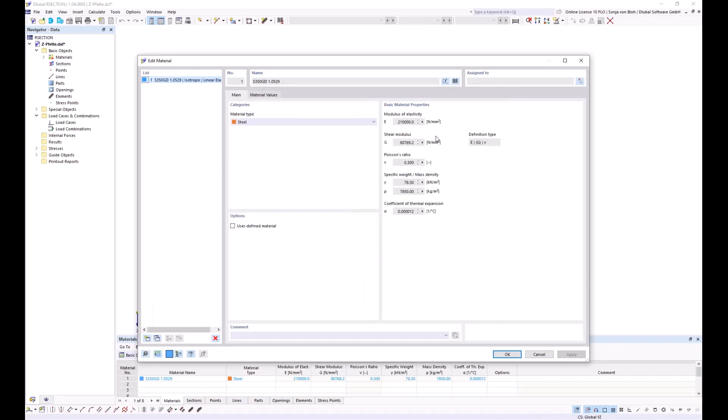Furthermore, I have to define the material here. I just want to use the material already shown, but if I wanted a different material, it would be possible to open the material library and select one from there. Click here on Cancel, then I start the import process and click on OK.

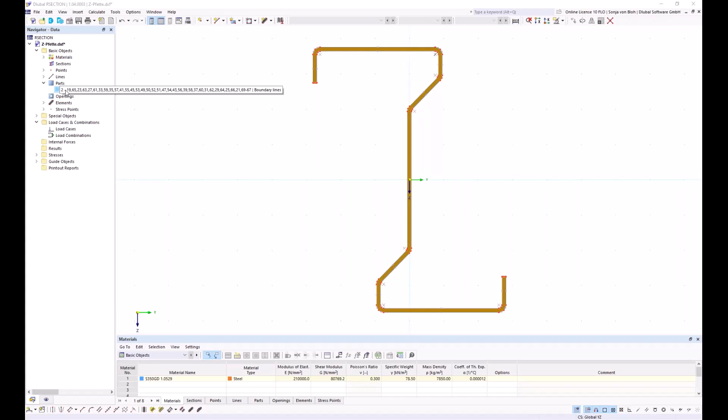With this import function, the part is created automatically, and the elements are also created automatically, as you can see here. The elements are required for the calculation using the thin-walled analysis and for the calculation of the effective cross-section.

I now want to go into the base data and choose the analysis method. Two analysis methods are available: the finite element analysis and the thin-walled analysis. I choose the thin-walled analysis. As already mentioned, elements must be defined for this. This setting only affects the default setting in RSTAB; if necessary, I can change the analysis method in RSTAB.

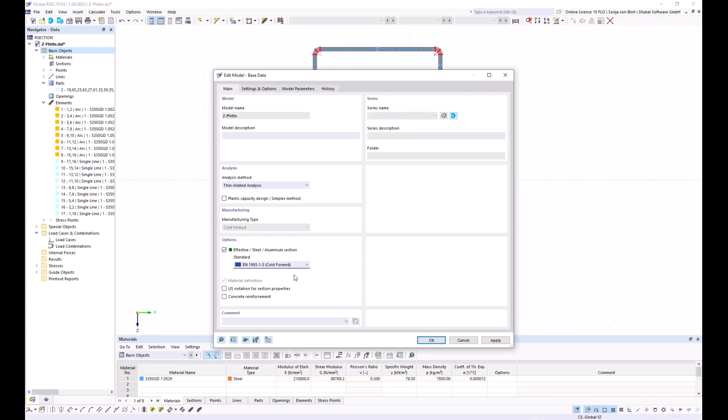Furthermore, I activate the add-on Effective Steel Section, and choose the standard Eurocode 3 Part 1.3 for cold-formed cross sections. This setting is necessary so that the steel design in RSTAB is carried out according to the standard for cold-formed cross sections. Then I click on OK.

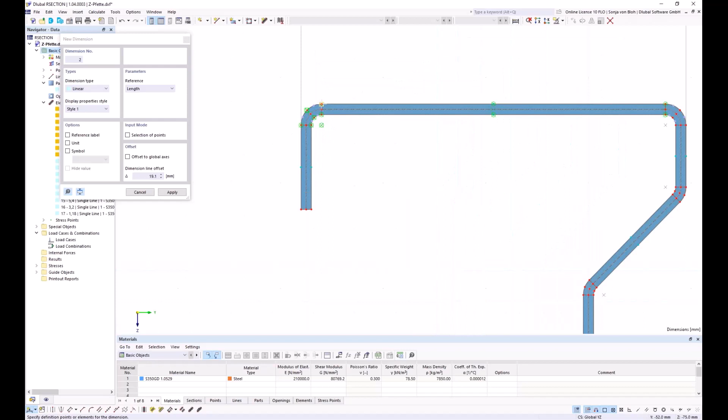It's also possible to dimension the cross section. I will do this, creating a new dimension and choosing the corresponding points. These dimensions can also be displayed in RSTAB.

In RSECTION, I can also calculate the effective cross-section and the stresses. This is useful, for example, for a preliminary design. This has been demonstrated in previous webinars, so I won't go into it today.

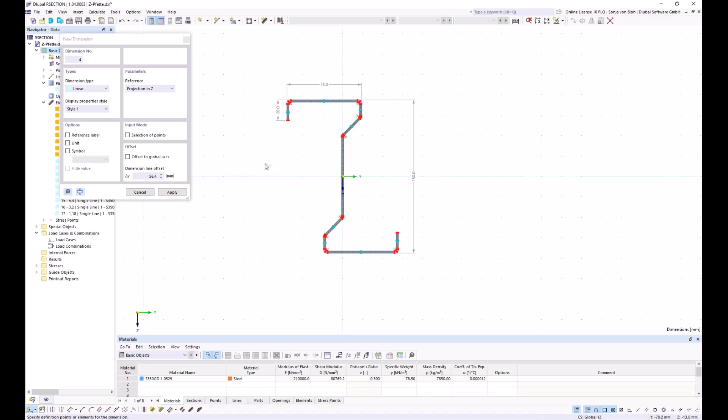However, it makes sense to start the calculation once to find any modeling errors. I go to Calculate All, and no error was shown, so it's possible to import this cross-section into RSTAB. Then I save this file, click on Save, and save it in this directory, and then I can switch to RSTAB.

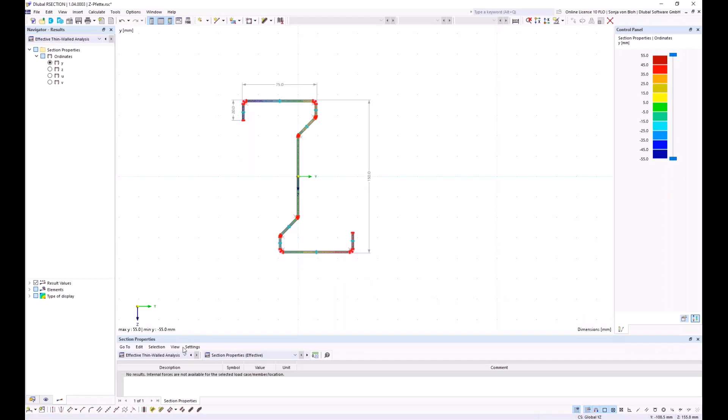I have already created the steel hall in RSTAB. The purlins consist of the cross-section just created in RSECTION. For now, I have assigned this cross-section to them, and I want to modify this cross-section.

For this, I open the Edit Section dialog, and then I open my cross-section library. And then I want to import my created cross-section in RSECTION.

The folder in which the RSECTION cross-section is stored must be integrated into the Dlubal Center. It's only possible via the Dlubal Center to import a cross-section from RSECTION. And I want to put this folder directly under the project, so I check.

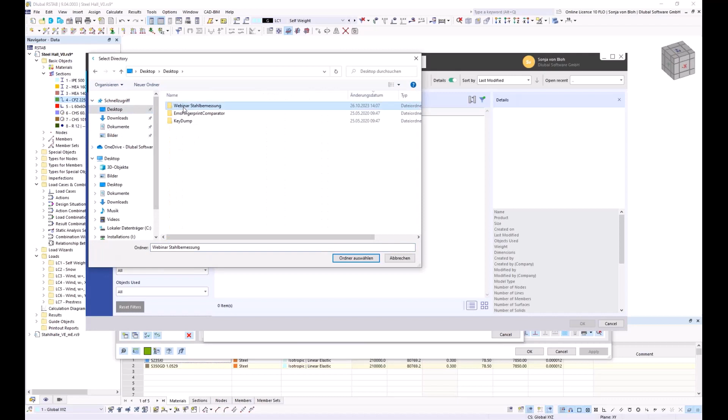I choose Add Existing Project here from the context menu, and then I choose my folder. It's here on the desktop, and then I click on OK. The folder is now linked to the Dlubal Center, and I can select the RSECTION cross-section.

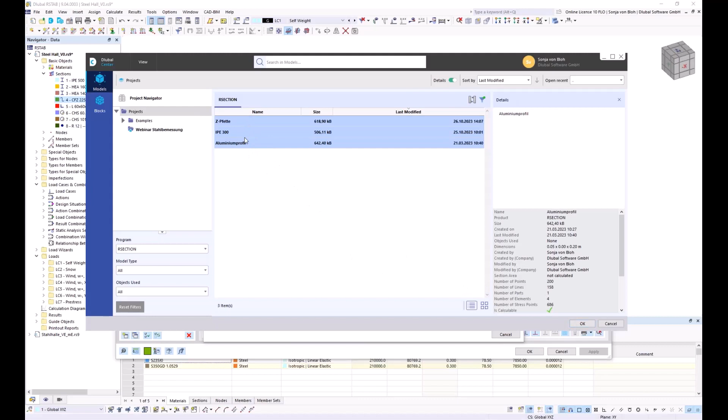It has recently become possible to import multiple cross-sections in one step. For this, I have to select these cross-sections, and then I can click on OK, and all the selected cross-sections will then be imported into RSTAB. Now I only want to import this cross-section, so I click on OK.

Here the checkbox thin-walled model is activated. This setting was taken from the chosen analysis method in RSECTION. However, I can also deactivate this option here so that the calculation of the gross cross-section properties is then carried out using the finite element analysis. If this option cannot be selected, then no elements are defined in the RSECTION cross-section.

You can see here in the graphic of the cross-section that the dimensions are shown. These are the dimensions I have created in RSECTION. And I click here on OK.

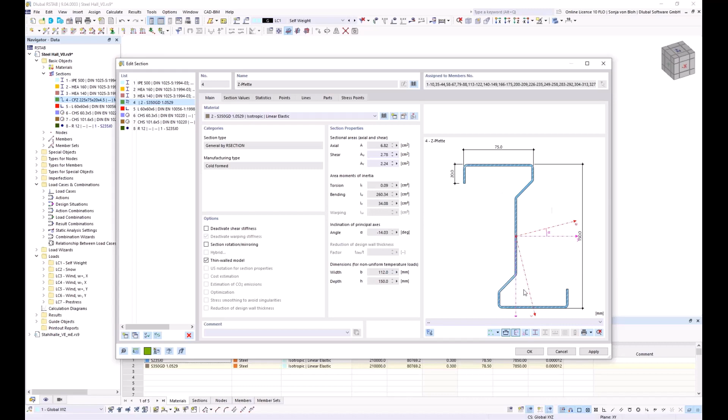For cold-formed cross-sections, the center of shear lies outside the cross-section and the main axes are rotated. Usually the loads don't act on the shear center, which results in double bending and torsion. Usual lateral torsional buckling checks cannot be carried out.

Eurocode 3 Part 1.3 includes design methods for cold-formed purlins, but the purlins must be within certain limits. These simplified design methods are not implemented in steel design. The lateral torsional buckling of any purlin can be carried out according to the second order theory, considering warping torsion and the use of equivalent imperfections.

I would like to show this approach today, and for the calculation considering the warping torsion, I first activate the add-on warping torsion in the base data. For this, I go to the base data, on top add-ons, and then I activate this checkbox here.

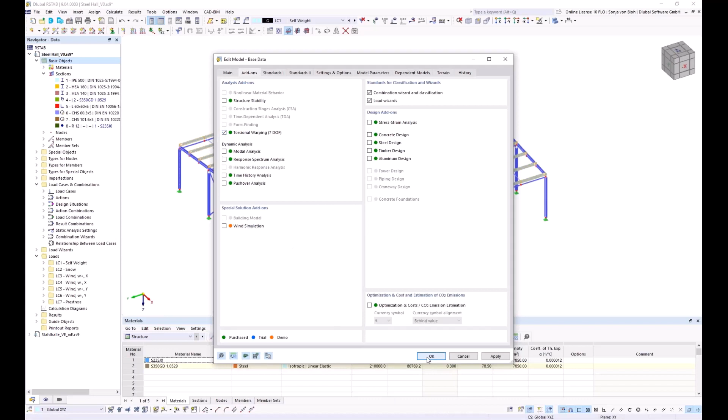Warping at the member ends is assumed to be unhindered by default. To transfer the warping between members that are connected, you can define a set of members. The frames consist of several members.

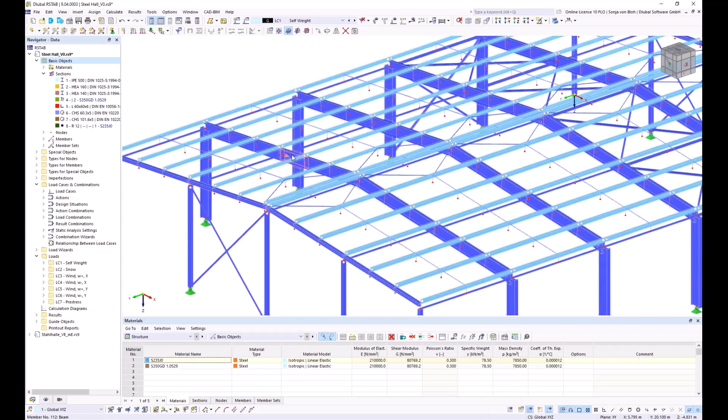You can see it here. These members are divided, and this means that there are warping releases between each member. The warping should be continuous for the frames, so I've already defined a set of members for them.

I show you this in the wireframe model. Here I've created the set of members for each frame, and if I open the Edit Member Set dialog, then you can see here a checkbox discontinuous torsional warping. This option controls whether the warping should be transferred or not. This is supposed to be transferred, so I don't check this checkbox.

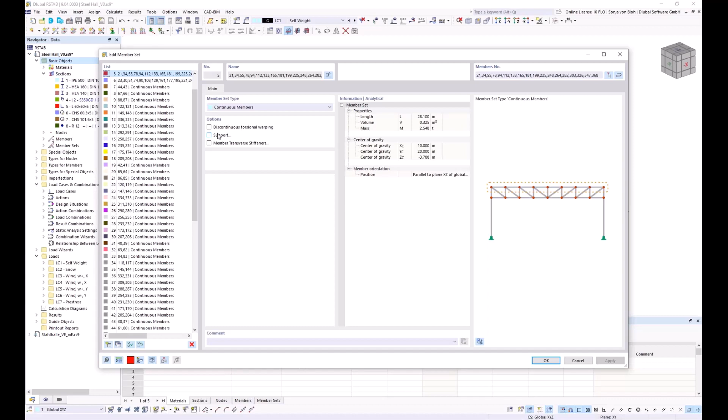Furthermore, the purlins are divided at the connection point here with the purlin suspensions, and the warping should be continuous for the purlins. So I've defined set of members for the purlins too. You can see it here.

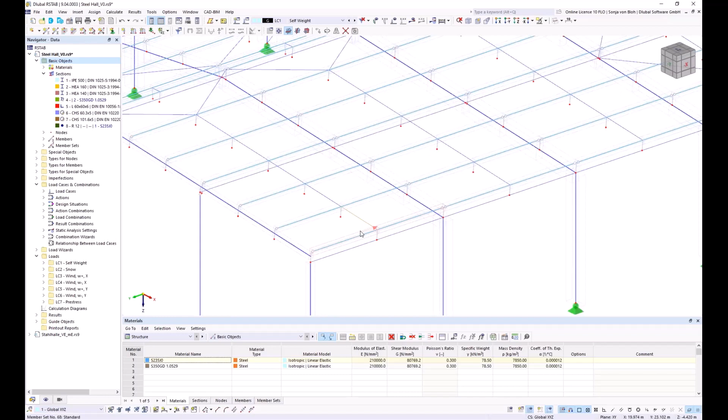When calculating with 7 degrees of freedom, the connection of members is always assumed to be at the center of gravity. If the connection is to be made at a different point, you can use member eccentricities, or you can also model the connection with rigid members.

In the steel hall, I have already defined member eccentricities for the transoms, the purlins, and the purlin suspensions. To do this, it's necessary to activate the checkbox eccentricity in the member dialog. I have done this here for the suspension.

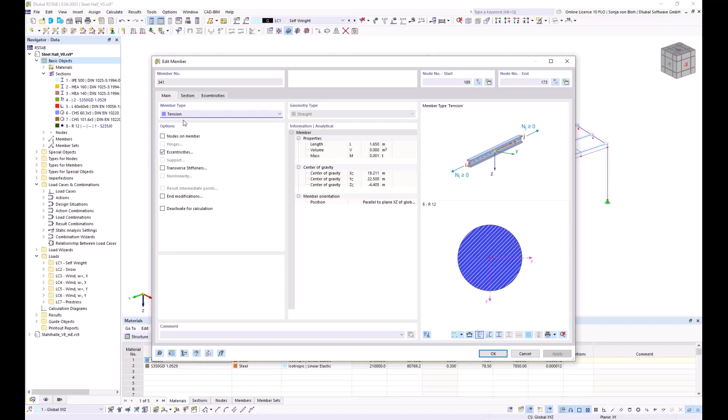Here I've activated this checkbox eccentricities, and here in the tab eccentricity, it's possible to assign a member eccentricity to this member. And I want to also look into this definition of the member eccentricity.

You don't have to calculate the eccentricities manually. You can also define them relative to another cross-section. I have used this option here. I have defined the eccentricity type relative to sections, and I have defined a transverse offset from the section of another member, so that the eccentricity is calculated automatically via the program.

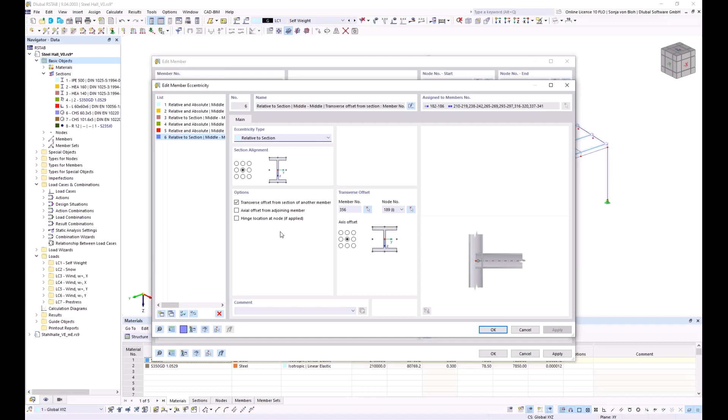The steel hall is covered with trapezoidal sheeting. I would like to use the trapezoidal sheeting as lateral and torsional support. I can take this stabilizing effect into account in RSTAB using shear panels and rotational restraints.

I first define the shear panel. I can do this via the navigator data. Here under types for members, I see member shear panels. I create a new one, and there are different types of shear panels to choose from.

We have here the trapezoidal sheeting or bracing, or trapezoidal sheeting and bracing. I want to define a trapezoidal sheeting, so I choose this type. Then I go to the tab trapezoidal sheeting, and I choose the trapezoidal sheeting from the library. I go here, and then I define this trapezoidal sheeting. It's a Hoesch T50.1 - 0.75. I click on OK.

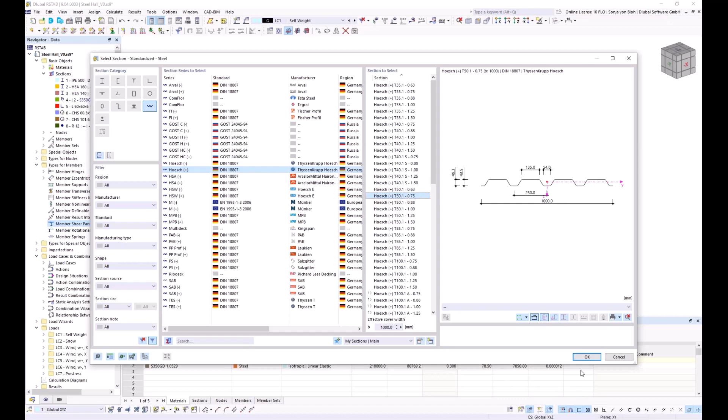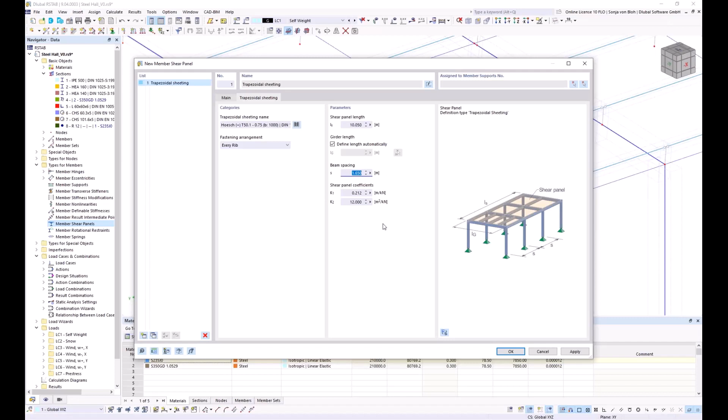The trapezoidal sheeting is fastened in every rib, so I choose this option here. The shear panel length corresponds to my roof length, and I can pick this graphically. I choose measure, then I choose my nodes, and now the shear panel length is defined as 10.05 meters. Then I have to define the beam spacing. I will do this also graphically. I measure this, it's the spacing between the purlins, and then I click on OK.

Next, I define the rotational restraint. I find this also in navigator data here. I create a new member rotational restraint. There are also different rotational restraint types, continuous or discrete. For the trapezoidal sheeting, the restraint type is continuous.

Then I go to the tab continuous. The trapezoidal sheeting and the material can then be selected from the database. The purlin spacing and the continuous beam effect still need to be selected. The spring stiffness C100 must be determined depending on the load.

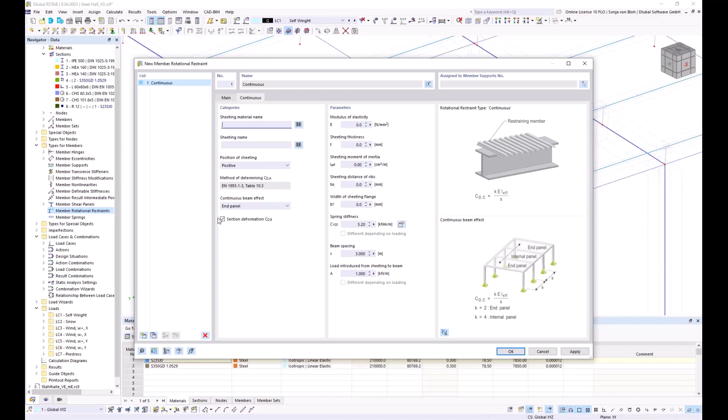Unfortunately, the effect of cross-section deformation on rotational restraint can only be calculated here for I cross-sections, but not for Z section cross-sections. The calculated spring stiffness would therefore be on the unsafe side, and I have determined the spring stiffness manually according to the formulas described in Eurocode 3 part 1.3.

And I would like to consider the spring stiffness, so I go back to the tab main, and then I choose here the type manually, and then I define the rotational spring stiffness. I've calculated it to 1.07 kilonewton meter per meter.

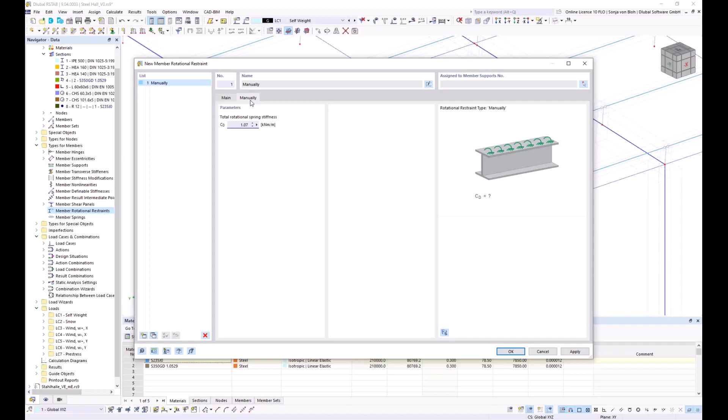I click here. I now have to assign the shear panel and the rotational restraint to member supports. I'm creating a new member support. I will do this also via the navigator data, and here I create a new member support. Then I choose my shear panel in Y and my rotational restraint about X.

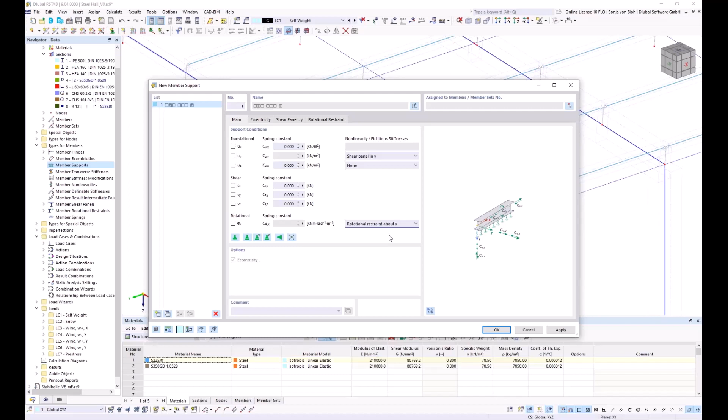The trapezoidal sheeting lies on top of the purlin, so I define an eccentricity, and here I define the reference on the top. Then I go to the tab shear panel in Y. Here I choose the shear panel type I've just created, and I will do this also for the rotational restraint. Here I choose the manually defined rotational restraint.

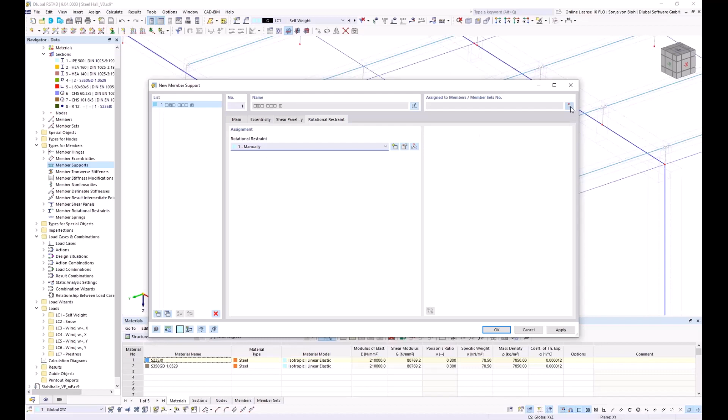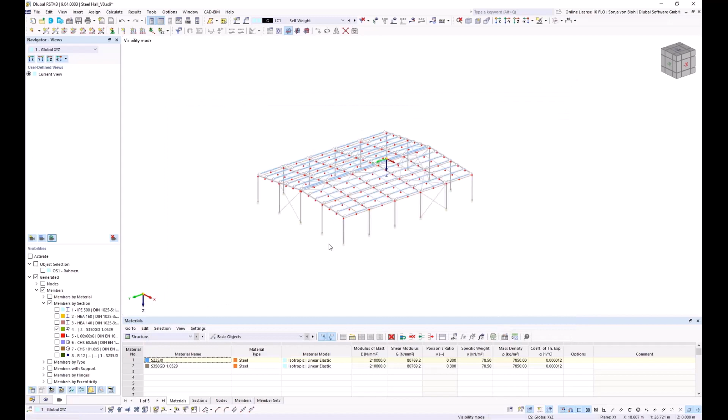I now assign the member support to the corresponding members. To do this, I click here on Pick Members, and I use visibility for it. Here I use a generated visibility. I choose the cross-section of my purlin. Then I activate the visibility, and then I choose my members. Then click on OK, and OK, and then the shear panel and the rotational restraint are assigned to these members.

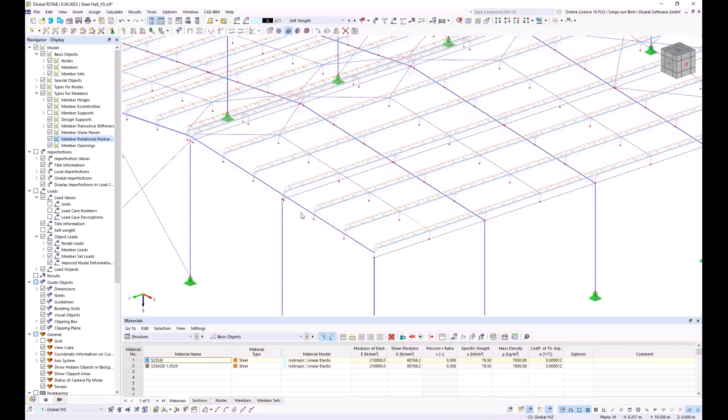It's also possible to display the rotational restraint and shear panel graphically. To do this, I go to the navigator display, and you can find the checkboxes here under types for members. Here I activate member shear panels and member rotational restraint. I will see it if I cancel the visibility mode. Here you can see now the shear panel and rotational restraint graphically.

Okay, I can uncheck these checkboxes again, I don't need it now. By default, rotational restraint and shear panel are not taken into account in the static, stability, and modal analysis.

I can also take these into account in these analyses by using a structure modification. I want to create this structure modification. I find it in navigator data under special objects, and here I define a new structure modification. The consideration of shear panels and rotational restraints is already activated here via this checkbox.

Then I modify the name of this structure modification. I name it Consider Shear Panel and Rotational Restraint.

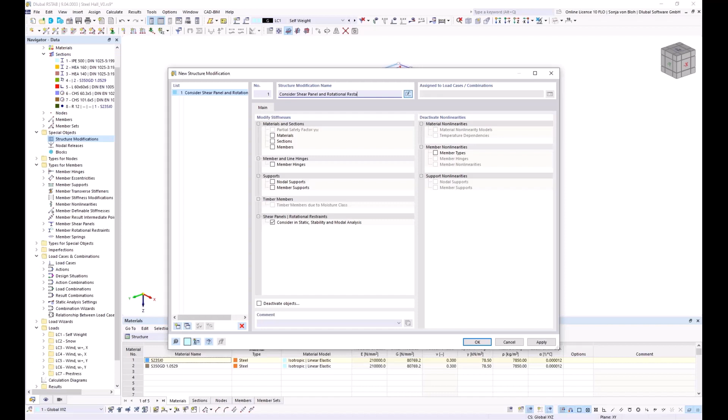And then I click on OK.

I then have to assign this structure modification to the relevant load cases or load combinations in which it should be taken into account. For this, I use the combination wizard, found in navigator data. I open it, and the only thing I have to do is check this checkbox, consider structure modification, and choose the corresponding structure modification. Then I click on OK.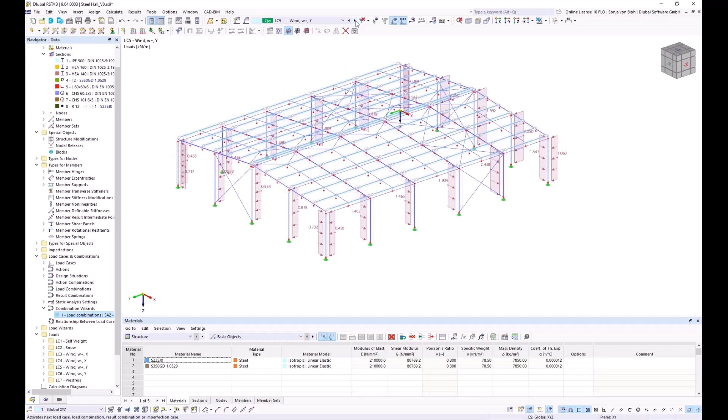I've defined already dead load, snow load, wind in X direction and Y direction. I will show you this by activating the view here. I have the load case self weight, then snow, also wind in X direction and Y direction, and also a pre-stress on the bracings.

I want to go back to my loads that I've applied on the purlins. If a member load without eccentricity is defined, the load always acts at the shear center in the calculation with 7 degrees of freedom.

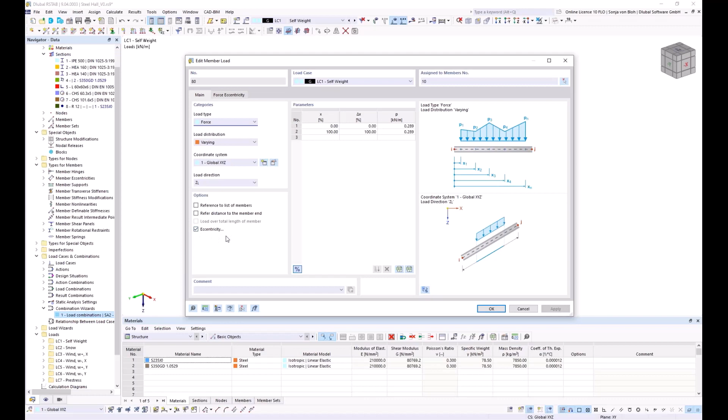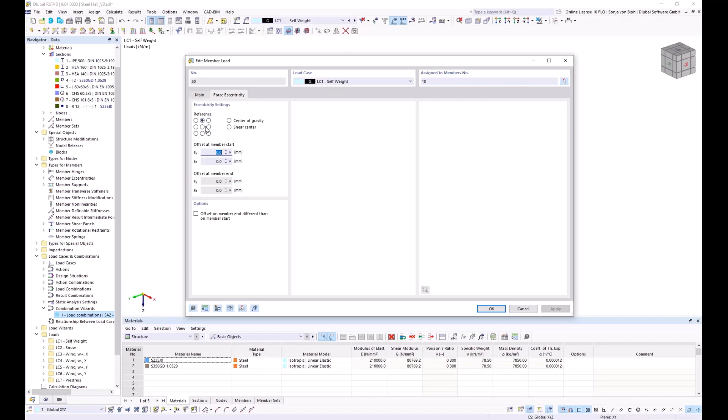I will go into this load, and here I have the possibility to define an eccentricity. If the load acts on another position, it's possible via an eccentricity to change this. I've activated the eccentricity checkbox, and in the force eccentricity, it's possible to define the eccentricity for the loads. The load should act on the top of the cross section, so I've defined the reference on the top. Click here, okay.

I've already created global imperfections. I will show you this now. I've created global imperfection in plus X direction and also in plus Y direction. And I now have to define the initial bow imperfection for the purlins.

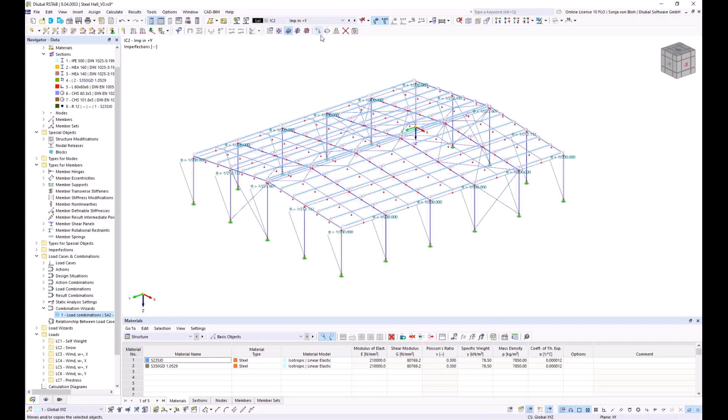The various options for defining imperfections have already been demonstrated in previous webinars. Today, I would like to show the definition of local member imperfections. The purlin is supported in Y direction by the purlin suspension, so a two-wave imperfection shape would be possible. If the suspension is not stiff enough, a single wave imperfection shape would also be possible. For the imperfections, I could now create two imperfection cases. However, it's also possible to use a stability analysis to obtain information about the imperfection to be applied and thus reduce the number of imperfection cases.

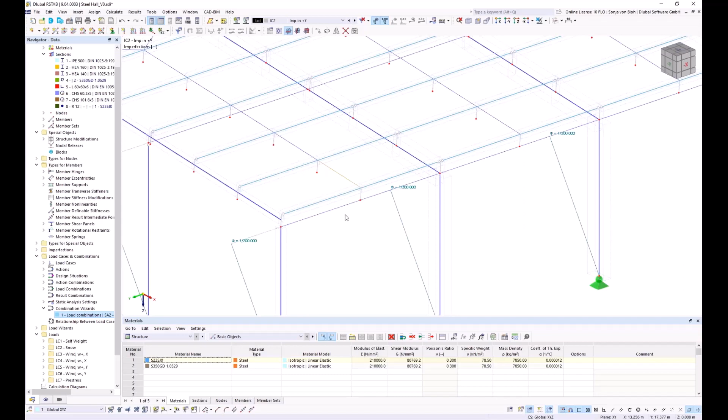I would like to show this now. To do this, I go to my navigator data, then to base data, and here I activate the checkbox structure stability. Then I click on OK.

I first look at the stability analysis settings. To do this, I open this here. I assume that local mode shapes for the purlins only appear at higher eigenvalues, so I increase the number of eigenvalues to be calculated to 25.

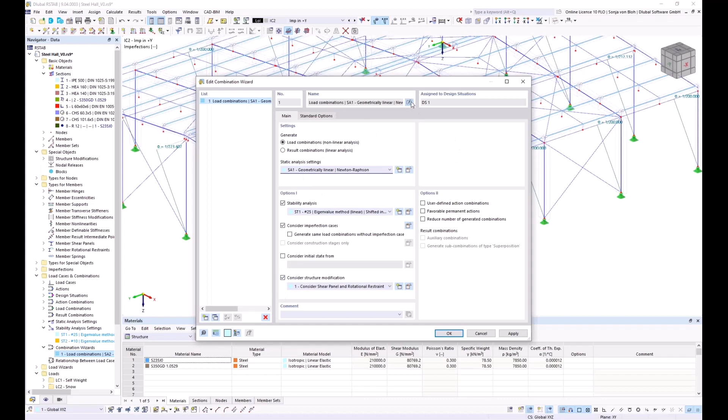In the combination wizard, I activate the stability analysis with the calculation of 25 eigenvalues, and I also change my static analysis settings to first order theory. And then I name this wizard stability.

I open now the design situations, and here the combination wizard stability is already chosen. Now the load combinations are generated considering the global imperfection, my structure modification, and my structure stability add-on.

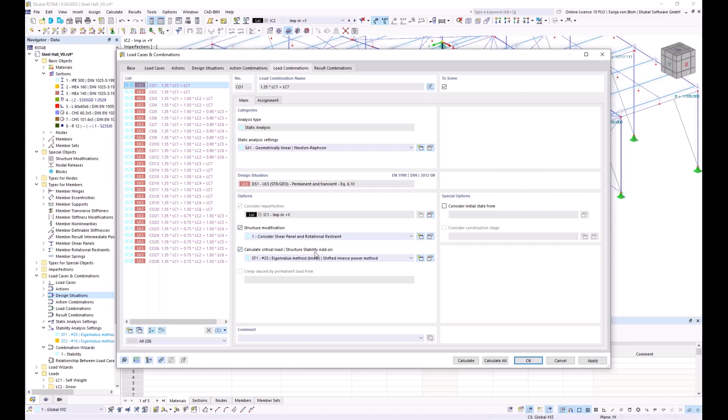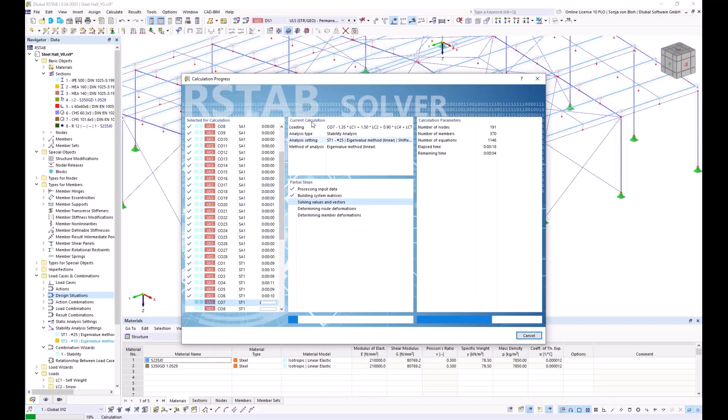I now run the calculation for my design situation 1. A message informs me that the cross sections or topology of the members in the member set are not compatible, and the warping may not be able to be transferred. The reason for this is, among other things, that the set of members of the frame is not straight. You can see it here. The column is angled to the other frame, and this is the reason for this warning message.

I assume that the warping can be transferred through the connection, so I ignore this warning message, and the warping is then transferred.

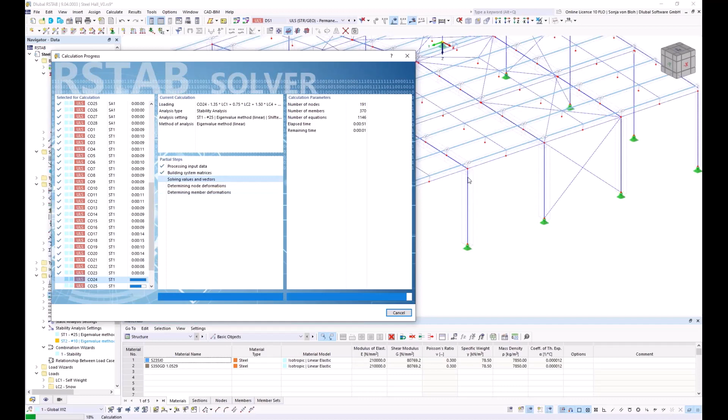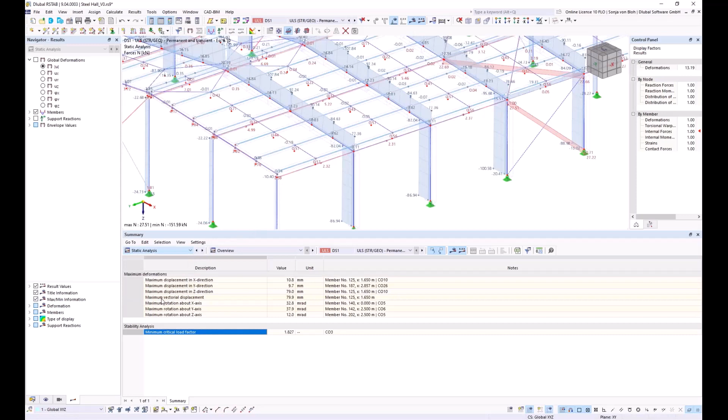Here on the overview, I can see that the minimum critical load factor is calculated in load combination 3. I will go to the stability analysis, and I will open now the load combination 3. I deactivate here the display of the loads.

As part of the stability analysis evaluation by mode shape, the mode relevance factor can be used to quickly differentiate between local and global mode shapes. A mode relevance factor of 100% means that a single member has maximum relevance for the considered mode shape.

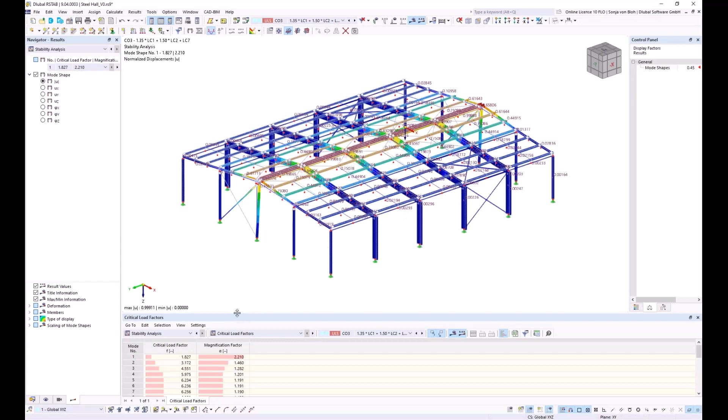To look into the mode relevance factor, I open a different table. Here, results by member, and here effective lengths and critical loads by member, and you can see here this mode relevance factor for all members.

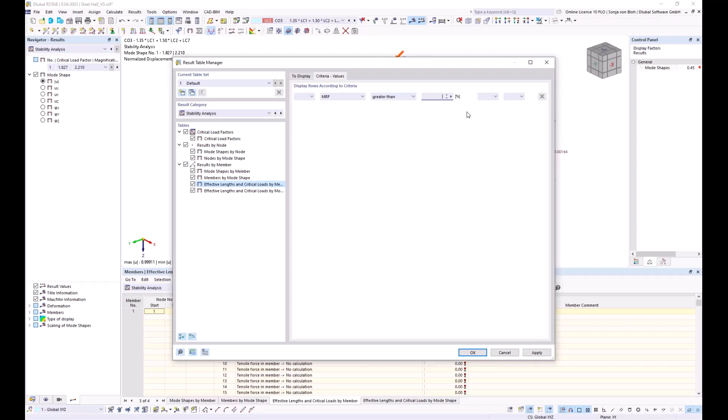I can also use a filter option to output only mode relevance factors that are greater than a certain value. I will do this now. Here I open the result table manager, and I activate this checkbox according to criteria. Here I can choose the mode relevance factor, and I want to see only mode relevance factors that are greater than 70%. I click here on OK.

And then I want to see here my member number 258, and this member has a mode relevance factor of 100%, and this means that it is a local eigenvalue.

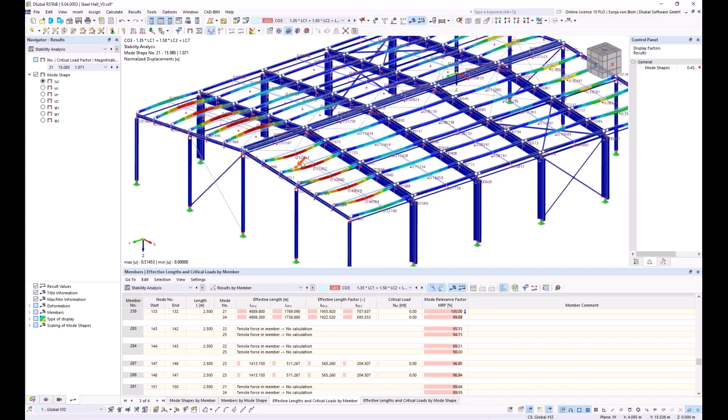I can see the mode shape, and this is a single wave here for the purlins, so I only have to define a single wave shape for the bow imperfection. I will do this now.

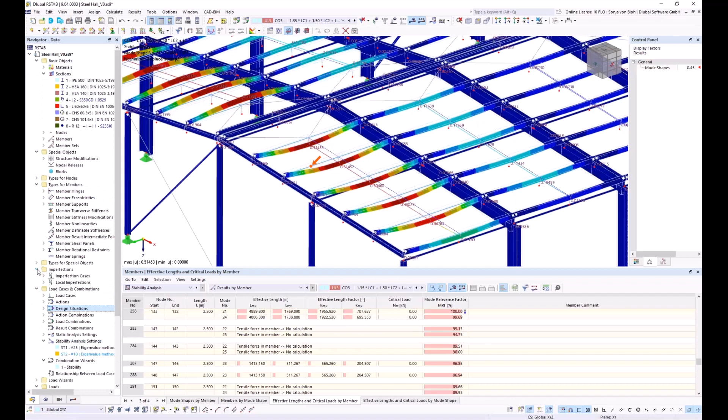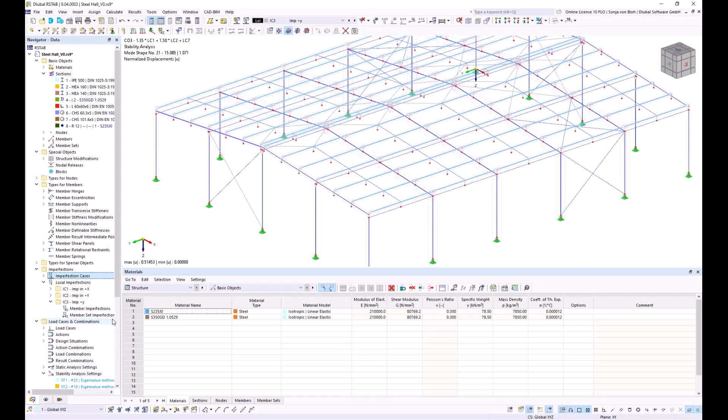For this, I create a new imperfection load case. I open the navigator data again, and then I create a new imperfection case. I name it imperfection plus Y direction, and I choose the imperfection type local imperfections. I now have to define the local imperfections, and I define a new member set imperfections.

Here I choose the imperfection type initial bow, and as definition type I choose manually relative. For the Z cross-section, I use according to table 6.3 of Eurocode 3 part 1.3, the buckling curve B, so I define an initial bow of 1 divided by 250.

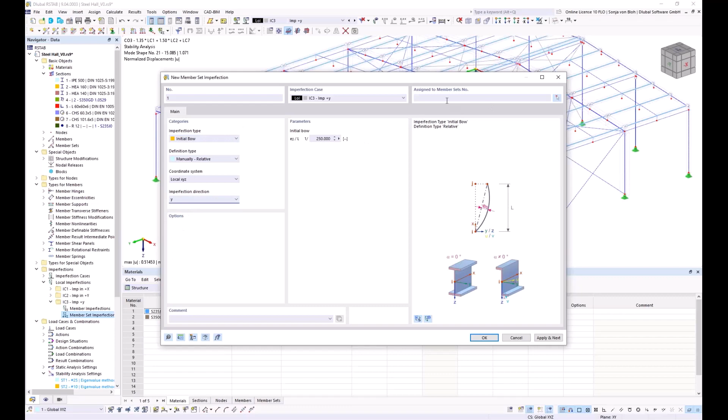And I want to assign this initial bow to the imperfection direction Y. Now I have to choose the member sets, and I activate my visibility once again. I choose the member sets, and click on OK. I can show this graphically if I activate the Show Imperfection button.

I now have to define the imperfection also in the opposite direction, and I will do this by copying the imperfection case imperfection plus Y. To do this, I go to the navigator data again, and open my imperfection case. I choose it, then click on button copy selected imperfection case. I rename this case, and then click on OK.

And all I have to do now is change the imperfection direction to minus Y.

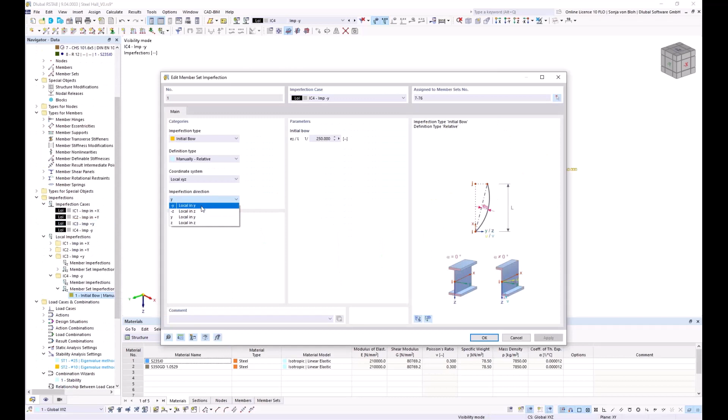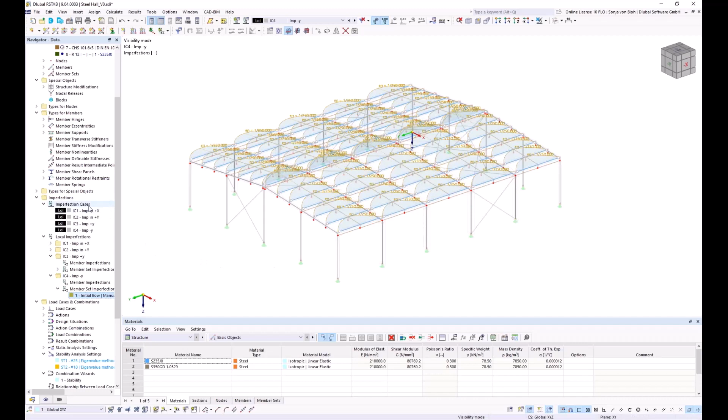I would now like to combine the imperfections with each other. For the combination of imperfections, I create a group of imperfection cases, and I will do this in the Edit Imperfection Case window. Here I create a new imperfection case from imperfection type group of imperfection cases, and I want to combine first my imperfection in global X direction with my imperfection in plus Y direction.

For this, I go to the tab group of imperfection cases, then create a new line, and here I choose imperfection in plus X with the operator, and imperfection in plus Y, and I name it imp plus X plus Y.

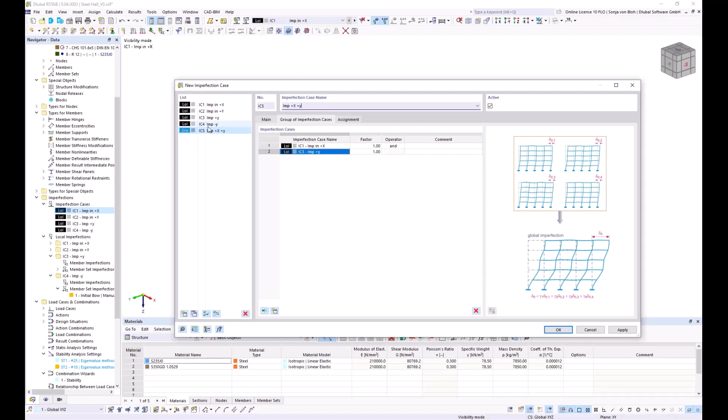The other imperfections I create by copying. So I select this group of imperfection, and then click on copy selected imperfection cases. And here I change the parameters to minus Y, and I need this also for the global direction Y. So I copy this.

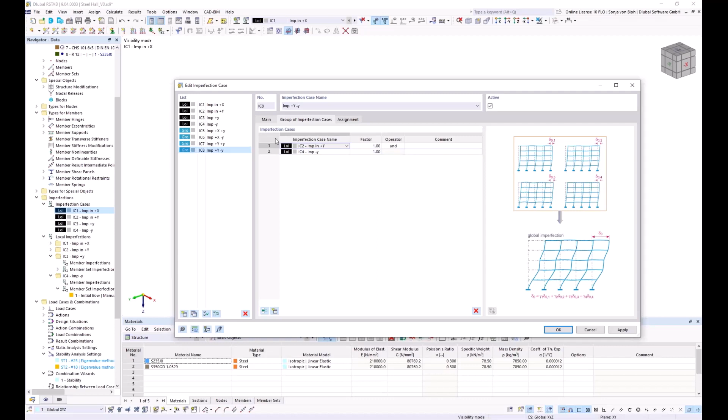All I have to do is change the name and the imperfection. So that the individual imperfections are not taken into account in the combinatorics, I deactivate for them the checkbox active. And then I click on OK.

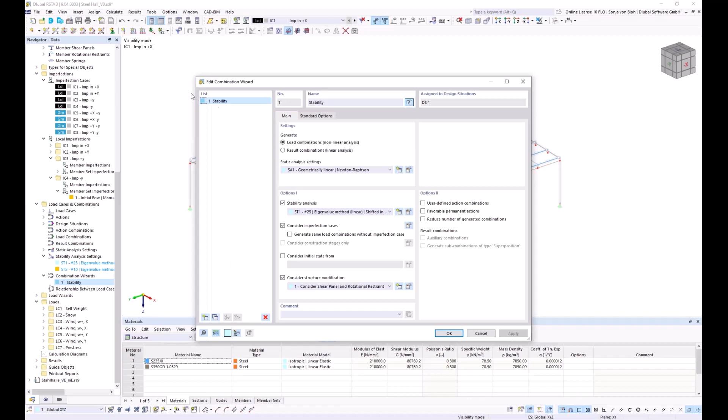Then I have to modify my combination wizard, or create a new combination wizard for my design situation. For this, I open the combination wizard dialog and I copy the stability wizard, and I name it design. And I want to do my design according to the second order theory, so I choose here second order.

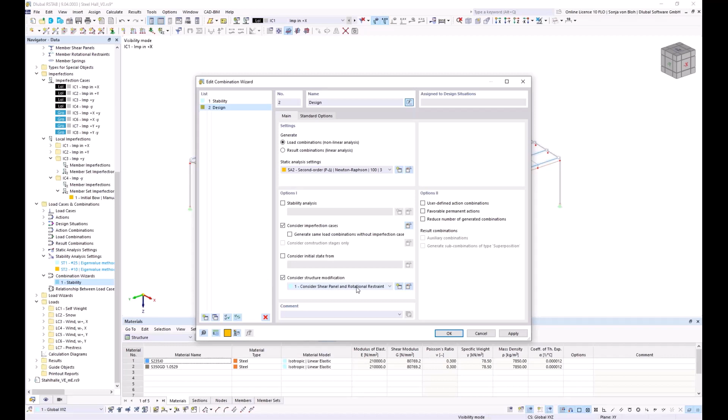I don't want to use the stability analysis anymore, and I want to consider my imperfection cases and my structure modification. Then I click on OK.

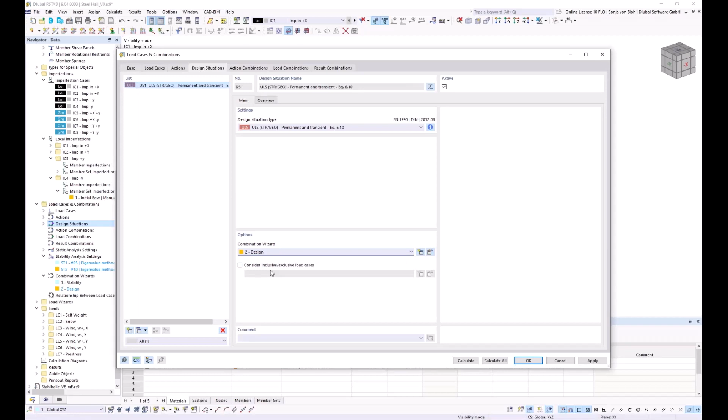I now have to assign this combination wizard to my design situation. For this, I add my design situation, and here I choose now the combination wizard for the design. If I go here, then I can see the results from my load combination. Here the imperfections are considered and also the structure modification.

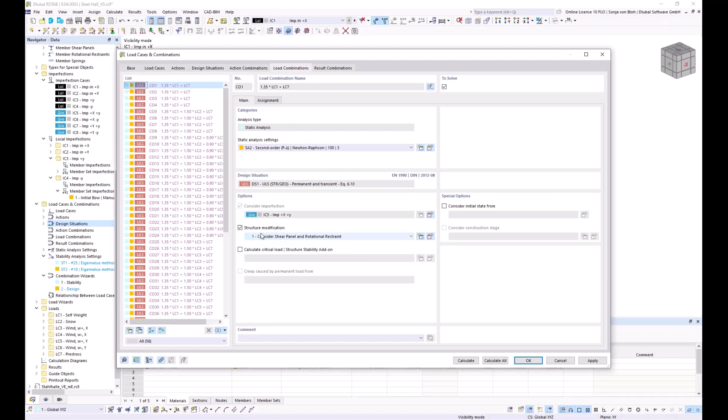The structure is complete so that I can make the settings for the steel design. For this, I first activate the steel design add-on in the base data. In the base data, on tab add-ons, I activate the steel design, and on the tab standards, I select the standard that I want to use.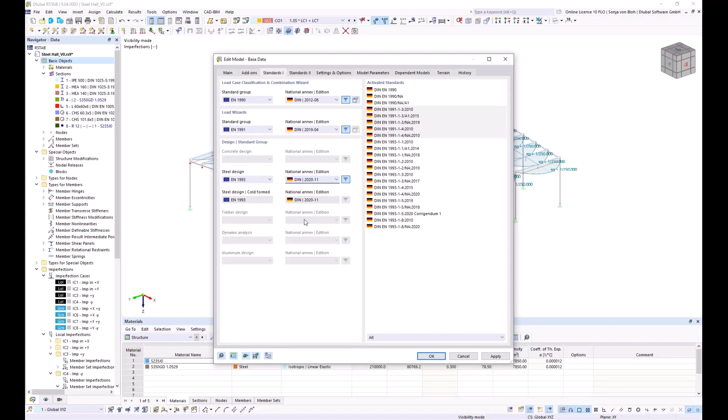I select here the Eurocode 3, and I select the German national annex, and click then on OK.

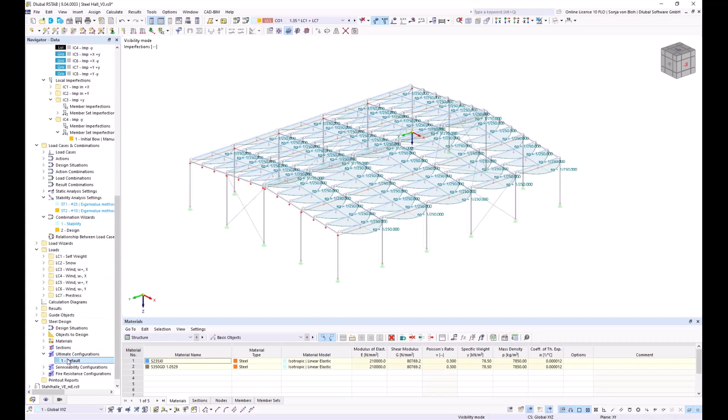I now want to look into the ultimate configuration for the steel design. I find it in Navigator Data, Ultimate Configuration. And here I deactivate the checkbox Perform Stability Design, since all stability effects are already included in the calculation.

Therefore, only cross-section checks have to be carried out, but with the partial safety factor gamma M1 for stability designs. For this, I have to activate this checkbox.

In chapter Design of Cold Form Sections, the steel design derives from the manufacturing type whether the design must be carried out according to Eurocode 3 Part 1.1 or Eurocode 3 Part 1.3 for cold formed cross sections.

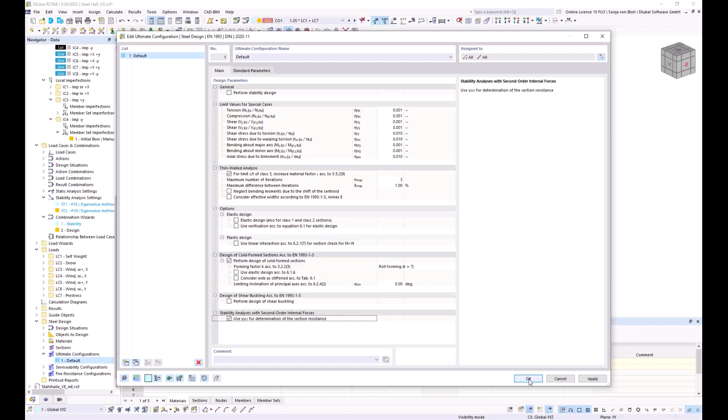If I deactivate this checkbox Perform Designs of Cold Form Sections, then the design would be carried out according to Eurocode 3 Part 1.1. Then I click on OK.

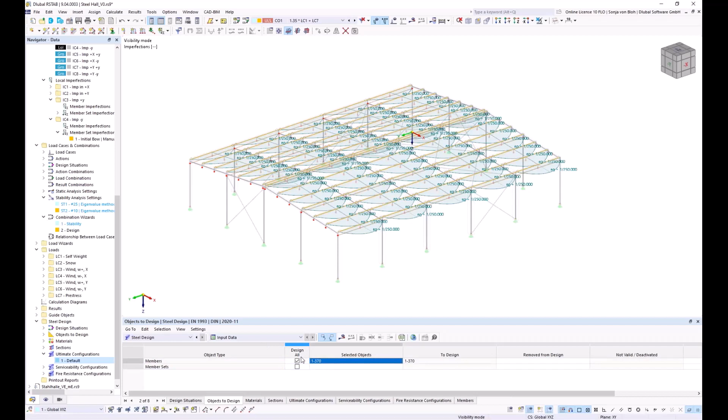In the table steel design and the add-on steel design, in tab Objects to Design, I choose the members that I want to design. I want to design all purlins. I deactivate here the checkbox member sets, and then I choose the purlins. I activate the visibility first, and then I select all my purlins, and click OK.

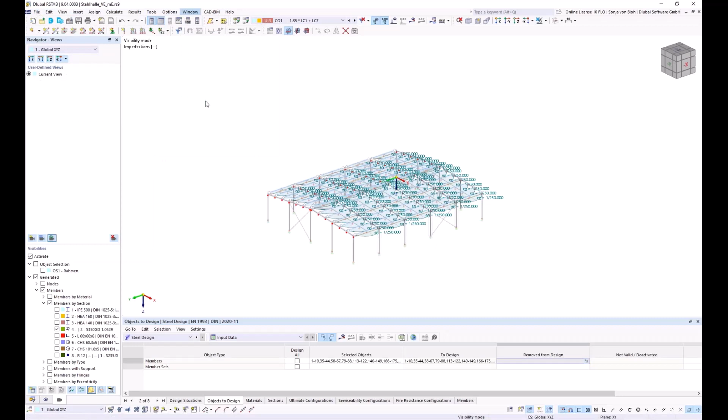The calculation takes time because the effective cross-section is calculated in an iterative process. I therefore show you the results in a calculated model.

And here I go to the design ratios on members. In the table, the numerical results of the design are shown. To display the details, I double click on the corresponding table row.

Separate effective cross sections are calculated for axial force, major axis bending, and minor axis bending. According to the information from the Standards Committee of Germany, the effective cross-section can also be calculated for the combination of internal forces in a design with 7 degrees of freedom using imperfections. We will implement this in future.

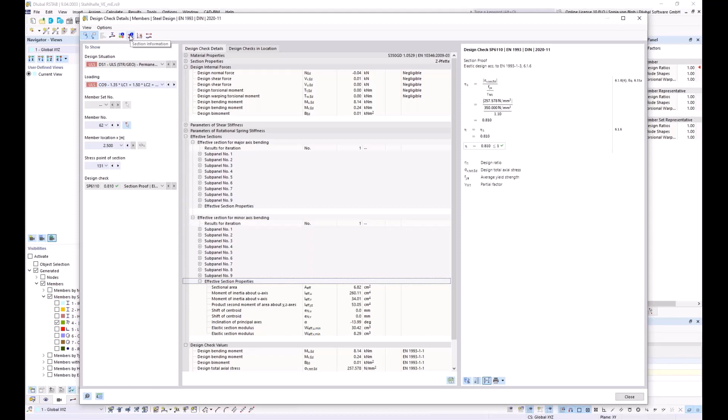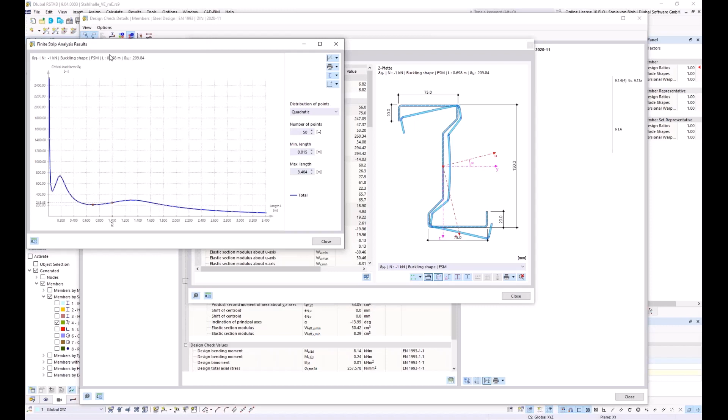The effect of distortional buckling is determined using the finite strip method. You can display the mode shape via this button here, section information. And here we have the buckling shape for only axial force, for major axis bending, and for minor axis bending. I will show you the buckling shape for only axial force, and by default the mode shape for distortional buckling with the associated critical load factor, which you can see here, is displayed first.

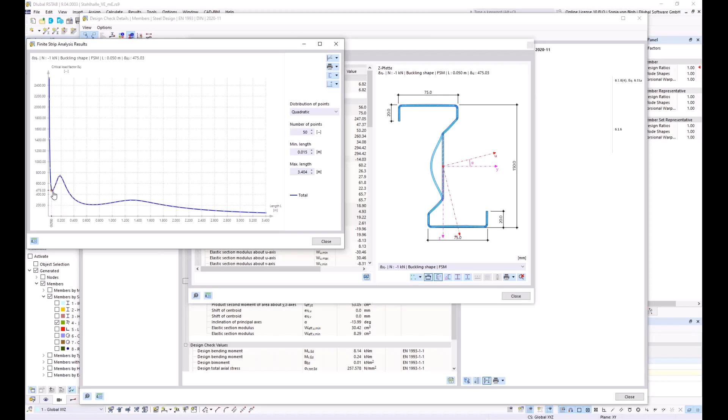By clicking on the point on the graphics, further forms of instability can be displayed. Here you see the instability form for local buckling.

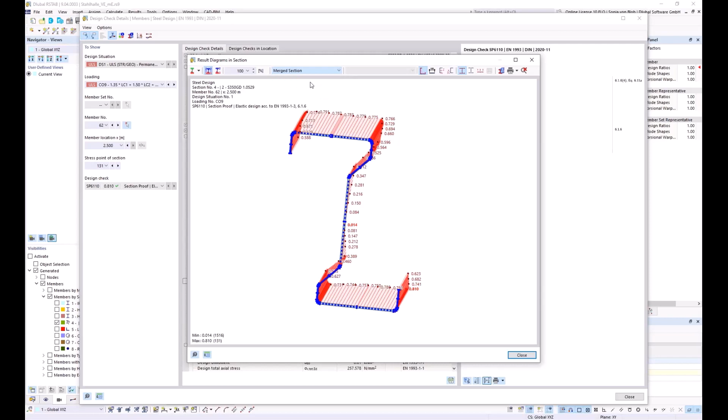The stresses can also be displayed graphically. To do this, I open the result diagrams in section, and it's possible to display stresses on the gross cross section, and it's also possible to display stresses on the effective section. If I want to see the effective section due to major axis bending, I choose this setting, and I can now see this element is reduced due to local buckling, and here the lip is reduced due to distortional buckling.

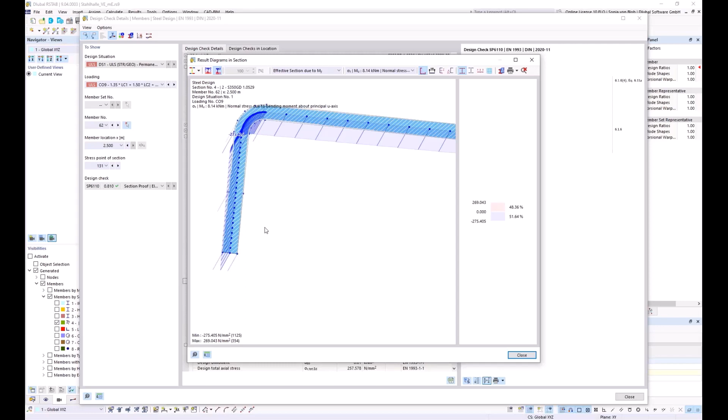The elastic design according to chapter 6.1.6 is carried out. The utilization is below 1 for all purlins, so the cross-section and stability checks are fulfilled. That brings me to the end of the webinar.